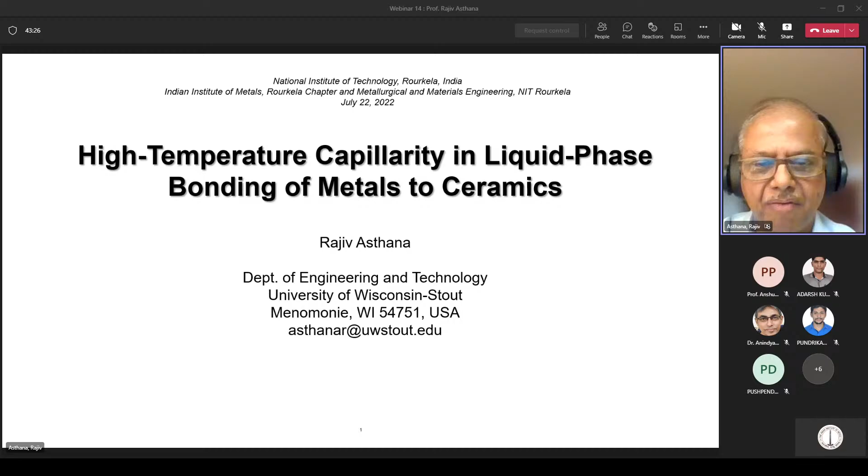The university is basically the only so-called polytechnic university in the state of Wisconsin. In Wisconsin we have several different universities; the state university system is called the University of Wisconsin system. Madison and Milwaukee are the two major flagship campuses, and then we have 12 other campuses of the University of Wisconsin, and Stout is one of them. We have very comprehensive career-focused programs, and our employment of students has been very, very good for the last several decades.

So with that, let us get back to the topic here. What are the areas impacted by the considerations of high temperature capillarity?

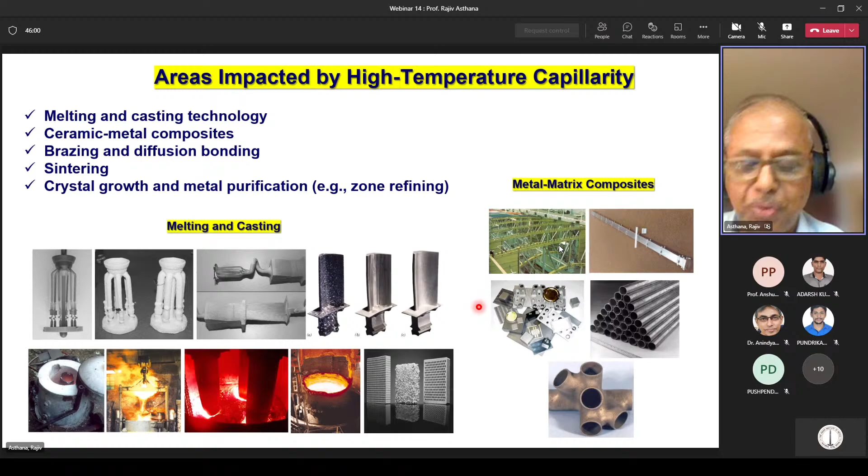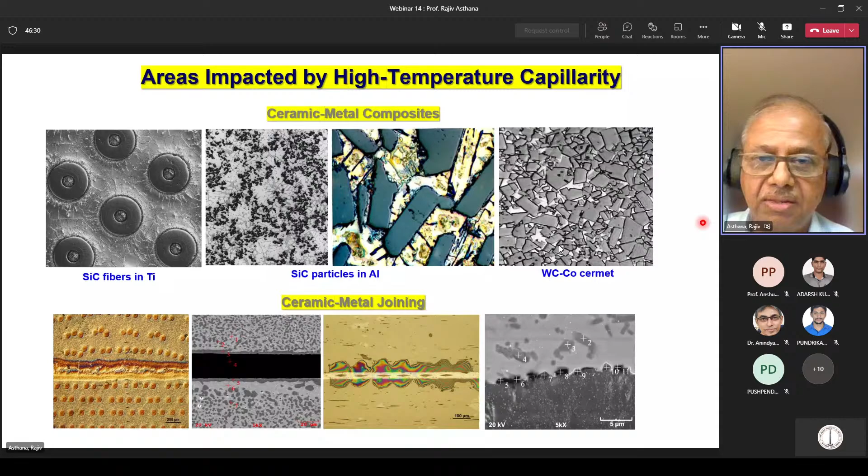We all know about metal composites, ceramic metal composites. You're basically trying to join either fibers of a ceramic or particulates with a metallic matrix, so it's again a joining case. Actual brazing and bonding involve macroscopic or large bulk specimens to be bonded to one another with a metallic or non-metallic interlayer. So these are the areas that we consider.

Here are some other examples I've been working on for the last several years. In joining, we looked at NASA's fuel injector system where we were trying to join silicon carbide discs to low expansion Kovar tubes. These are fuel carrying Kovar tubes, and these are perforated silicon carbide discs through which air would flow. These had to be joined together either by brazing or diffusion bonding, and the Kovar tube also had to be joined to silicon carbide. That was one system we looked at.

We created heat exchanger elements. This is just one unit where you have titanium tubes carrying a fluid that is bonded to high temperature carbon-carbon composite sheets and supported with highly conductive porous carbon foam. These kinds of elements are stacked and joined to create a heat exchanger. So we were looking at just the basic materials science part of joining here.

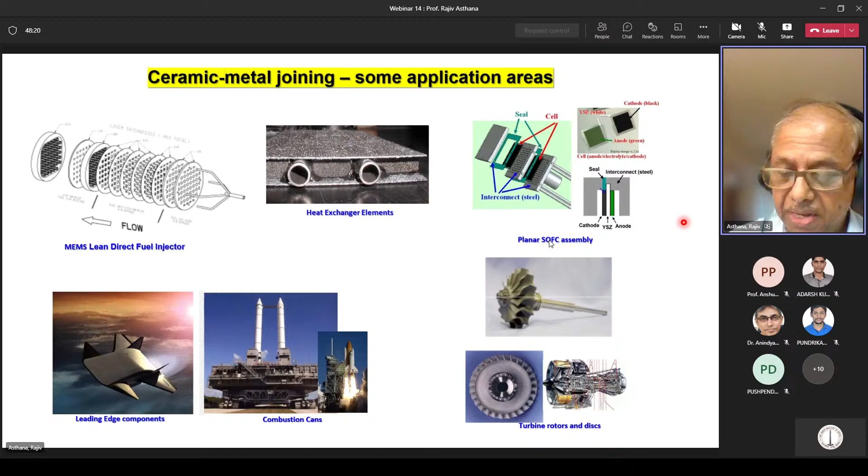We looked at solid oxide fuel cells, where you have a steel interconnect to be bonded to, let's say, zirconia, a YSZ kind of ceramic material. And then high temperature systems, silicon carbide composites joined either to themselves or to other materials. Also high temperature diboride based materials, and silicon nitride joining to Inconel and similar alloys for turbine applications. So those were some general areas.

I'm going to look at liquid phase bonding here in this talk today, so brazing is my focus. The concept in brazing is very simple. You take a joining material, basically some sort of a glue, metallic or glassy glue, and you melt it and then bring the two surfaces together under a very small pressure. The melted braze will spread over the surfaces, and upon cooling, the surfaces should bond.

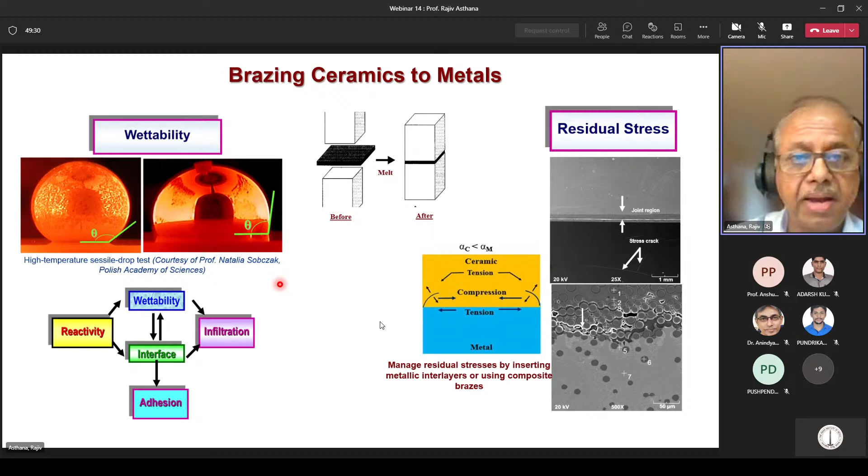Two key areas in this kind of process are wettability, the problem of wettability - that is, the liquid should be able to spread and bond to the surfaces - and then, because of expansion mismatch between the surfaces, there is quite often a lot of residual stress that has to be managed in some way or other. So in my talk today, I'm going to look mainly at the wettability part in high temperature systems.

The question is, why study high temperature capillarity, which is also called wettability? It's a very old, much researched topic, so what is the purpose of doing additional research on that? Well, there is a lot of data available, but very few data have high precision. The experimental process is very difficult. It's not easy to conduct these kinds of experiments because the conditions for experimentation have to be very stringent. Even under vacuum in your furnace, you are oxidizing the liquid metal, and that could interfere with the spreading process.

We will see some results on that. Also, there is no standardized procedure for characterizing the wettability of systems - we don't have any ASTM, ISO, or other kinds of standards. That is one of the challenges we have in studying high temperature systems. For low temperature liquids like water or organic liquids, there are a lot of commercial units available - optical tensiometers, as they're called, or goniometers, very simple devices that give you the wettability or contact angle data - but you don't have any system like that for high temperature systems.

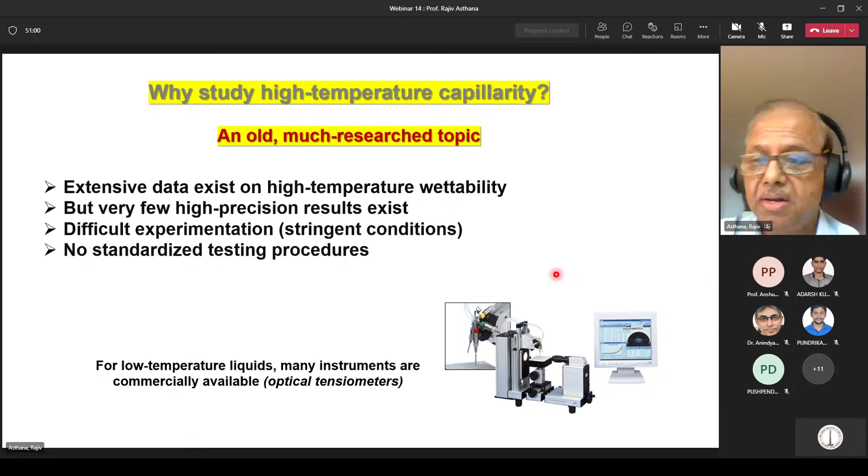And that is the reason we have some special needs here. Here is an example of a simple system: pure aluminum melt in contact with aluminum oxide. If you look at the literature data on contact angle versus temperature, you see numbers all over the place. Even with a small superheat, look at the scatter in contact angle data - somewhere from 85 degrees all the way to 165 or 170 degrees. The reason for that is that these kinds of measurements are extremely sensitive to testing conditions, material preparation, and other things. In fact, in the classical literature, contact angle has been used as a probe to study surface and interface phenomena.

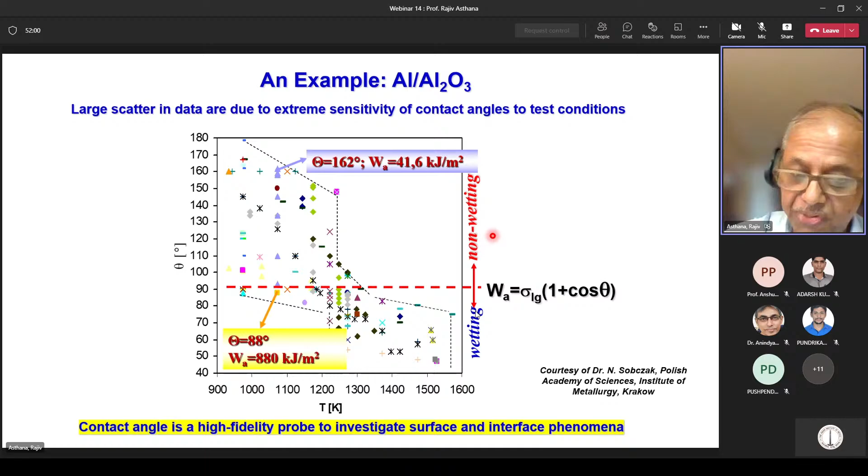Low temperature systems are much easier to examine than high temperature systems, and that's why we need some special devices to study high temperature interaction between liquid metals and solids.

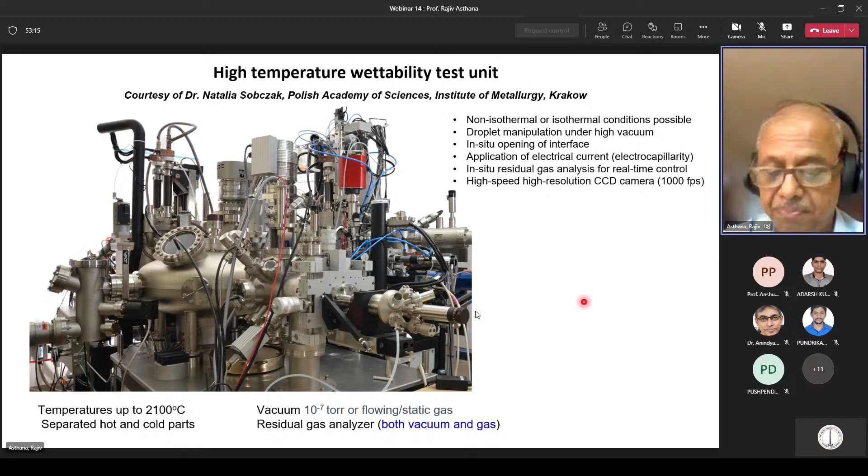So those issues are not critical in low temperature systems that have been studied in many other areas, but high temperatures present unique challenges. Just for a moment, going to the basics for students who may not be familiar with the topic: when you have a liquid droplet, a very teeny droplet that you bring in contact with a solid surface, the liquid spreads and then it stabilizes. Typically, if you have water on a clean glass slide, it will take a few microseconds for the droplet to stabilize and give you an equilibrium shape. For high temperature systems, the liquid droplet will keep spreading for half hour or an hour or more, mainly because of the reactions and interactions that take place between the liquid and the solid.

So the angle of contact is basically defined as the angle between these different interfacial tensions that occur at surfaces or interfaces between different phases: liquid, vapor and gas, liquid, vapor and solid. All of this formalism was developed more than 100 years ago for low temperature systems, and the same concepts are being used for high temperature systems, although not very effectively because of these unique challenges.

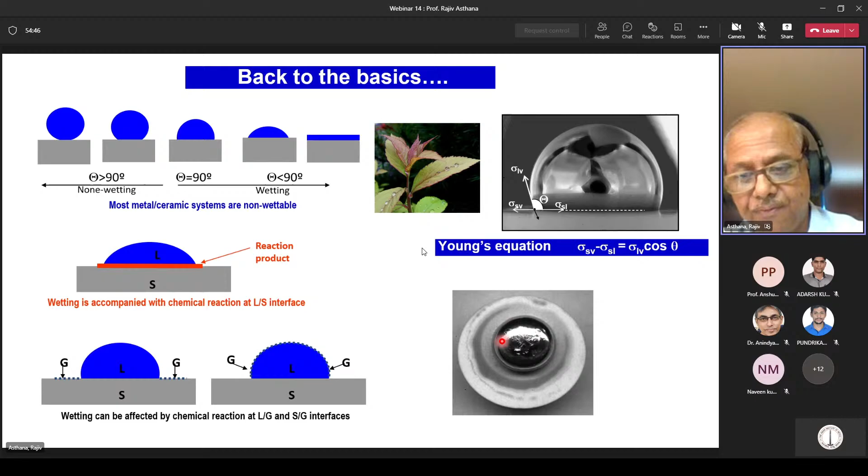Reactions, oxidation, surface roughening ahead of the spreading droplet, evaporation and condensation of the liquid ahead of the droplet in the vacuum chamber - the surface gets modified while the droplet is spreading. So those kinds of things, some of those things we looked at.

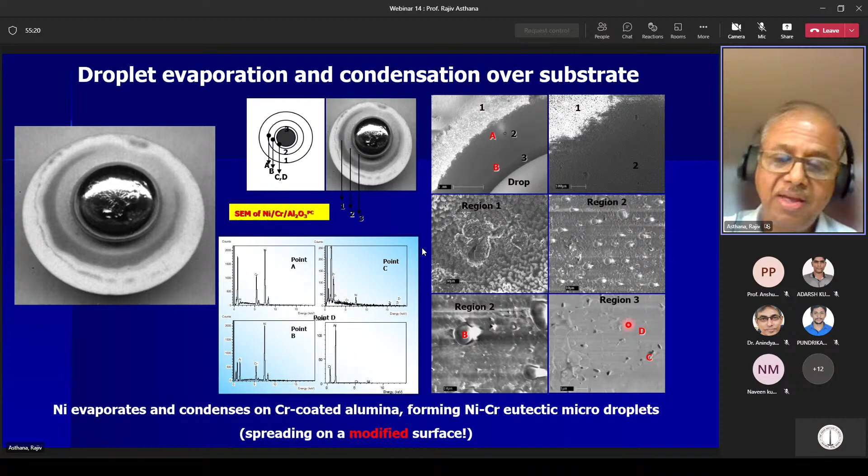Here is an example of a nickel droplet on a chromium coated aluminum oxide substrate. What we see here is that during the testing process, there is evaporation and condensation of nickel vapor on the surface, and it forms some little teeny eutectic droplets of nickel chrome over which this larger droplet is spreading. So these are very, very complex systems compared to the low temperature systems.

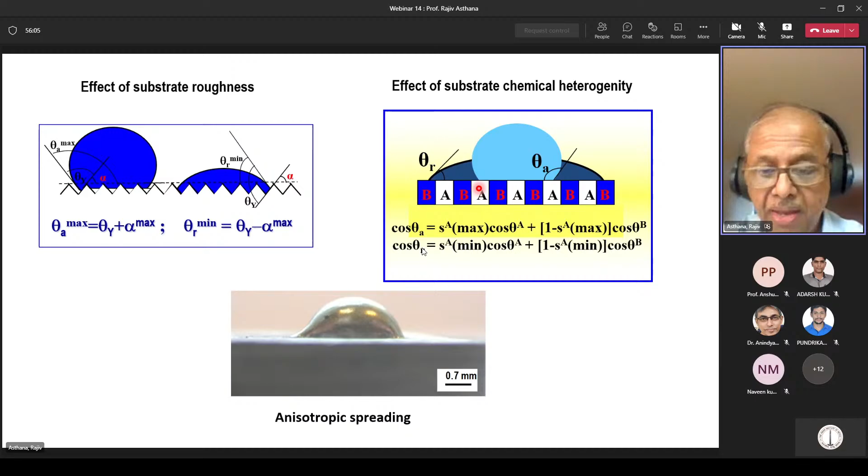Roughness of the substrate, the chemical inhomogeneity of the surface - all these things will influence how the liquid spreads and interacts with the solid. Sometimes the spreading process is not uniform or homogeneous. You have anisotropic spreading, so this side of the droplet spreads differently than the other side. Even in a simple system, like ordinary steel, a liquid will spread differently on, let's say, cementite and ferrite areas or other types of inhomogeneities. So it's quite challenging when you have high temperature systems.

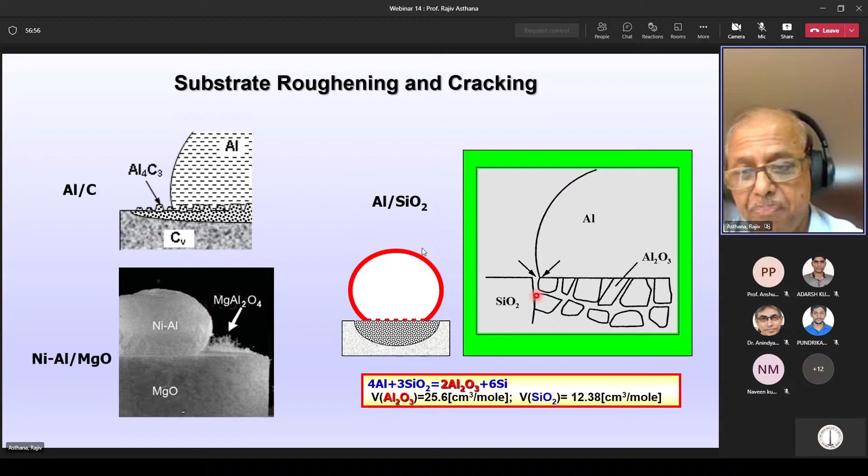In the nickel aluminum system, when nickel aluminum droplets spread on magnesium oxide, there's reaction and magnesium spinel forms like whiskers ahead of the droplet. In the aluminum silica system, for example, there is reaction between silica and aluminum oxide forms, and there is volumetric expansion, which again causes cracking and roughening.

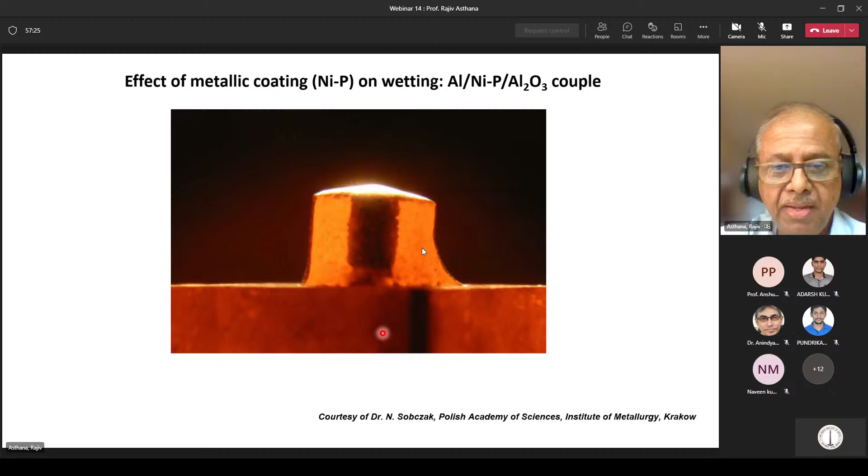So here is an example of how we study wettability in some systems. We are looking at aluminum droplets spreading on an aluminum oxide substrate with nickel phosphorus coating on it. These tests were done in Poland. And you can see that the liquid melts and begins to spread on the surface here.

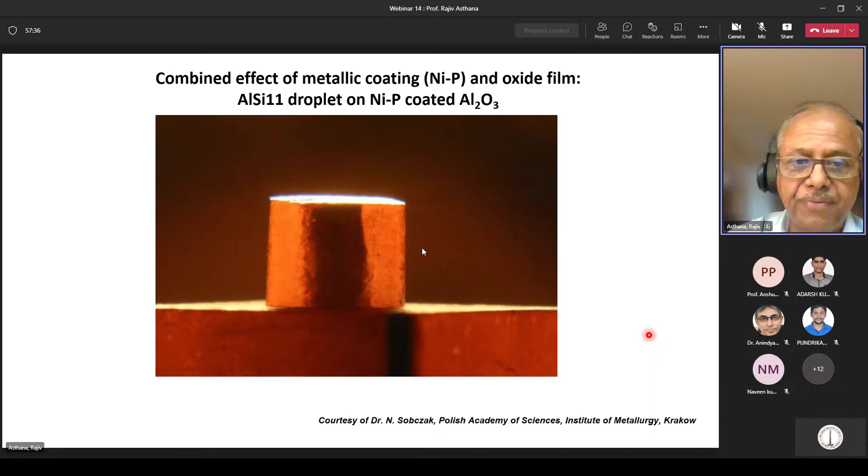Now, if you did the same kind of experiment in an environment where an oxide film forms on the droplet, the oxide prevents spreading of the liquid on the surface. And you can see this here.

Are you able to see the movie? I'm just checking it. Can you see that clearly?

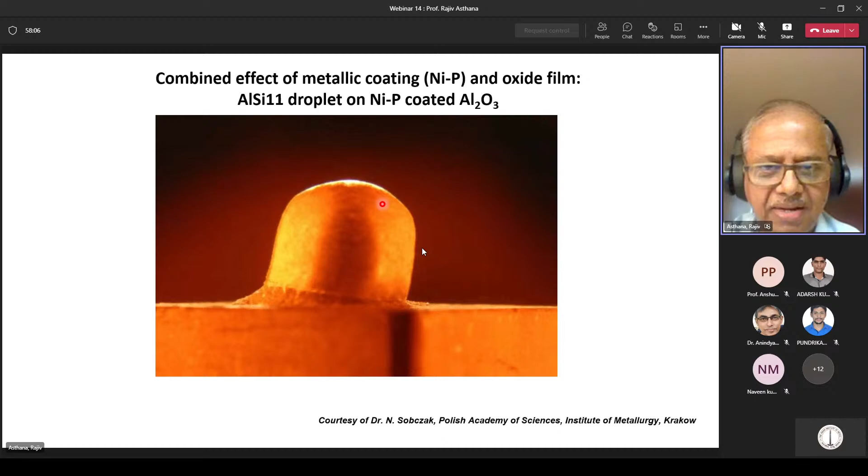Look at how this 2 millimeter droplet is spreading, and this oxide skin is preventing the spreading of the liquid underneath. So when you have situations like these, if you measure the contact angle without understanding what is happening on the surface, you get incorrect data.

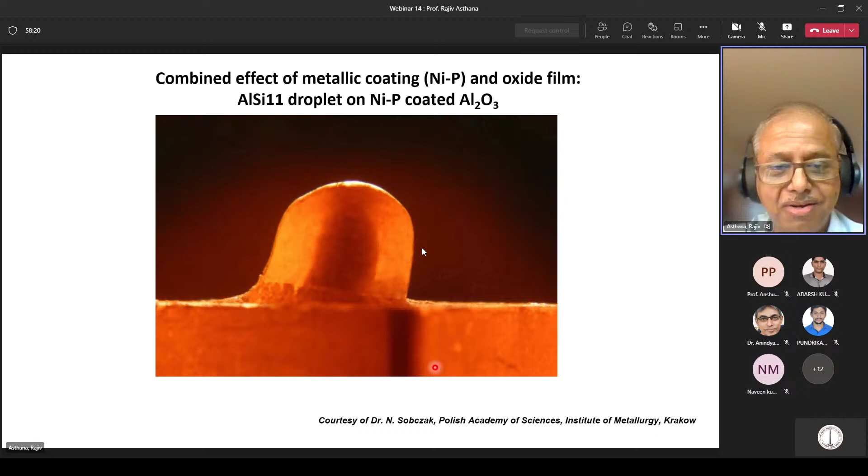Here is another video clip that shows what happens to the oxide skin when you go to high temperatures. It will dissociate and allow liquid to spread more homogeneously.

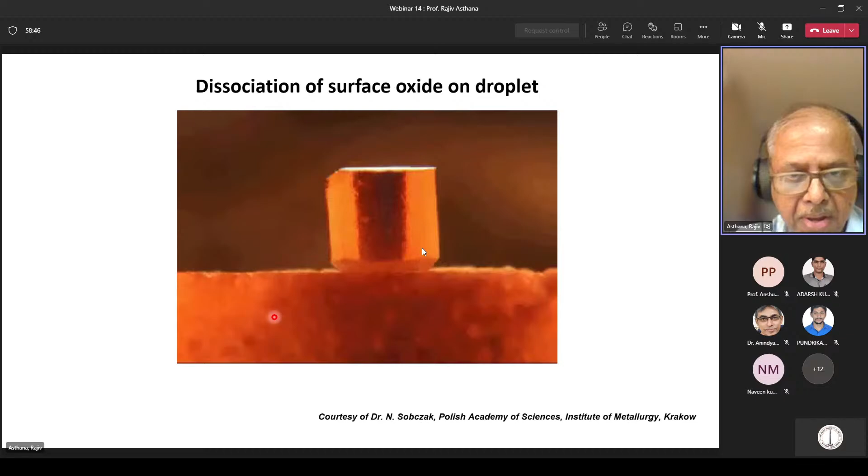I think for some reason my video clip is not running. Let me see if I can make it run here. You see the oxide that broke off on the droplet, and you can see the camera reflection very clearly.

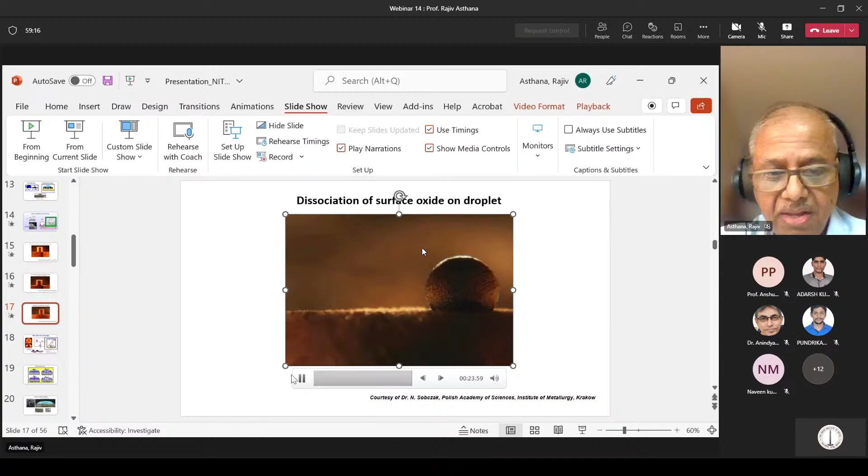Remember, all these experiments are being done under fairly high vacuum. Even then, the droplet is getting oxidized, which is not unexpected. And once again, if you take a look here, you will see the oxide breaking. You see here the little particles break, and it becomes a cleaner droplet.

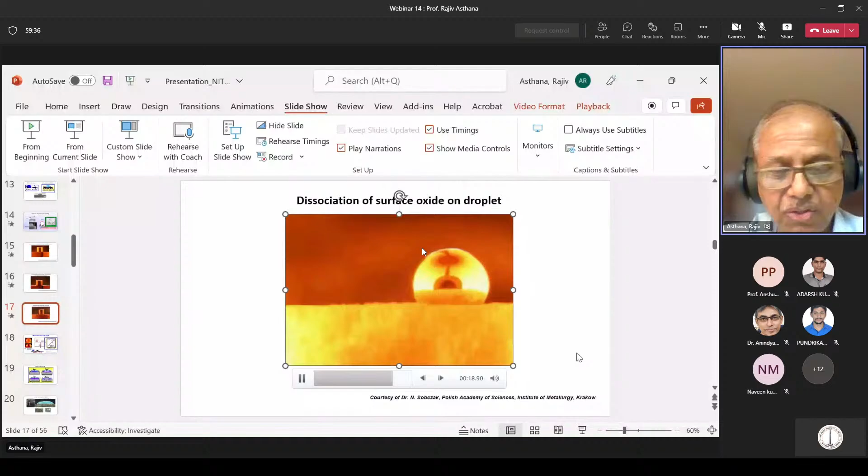So these kind of experiments allow us to study the liquid metal solid ceramic interactions in more depth.

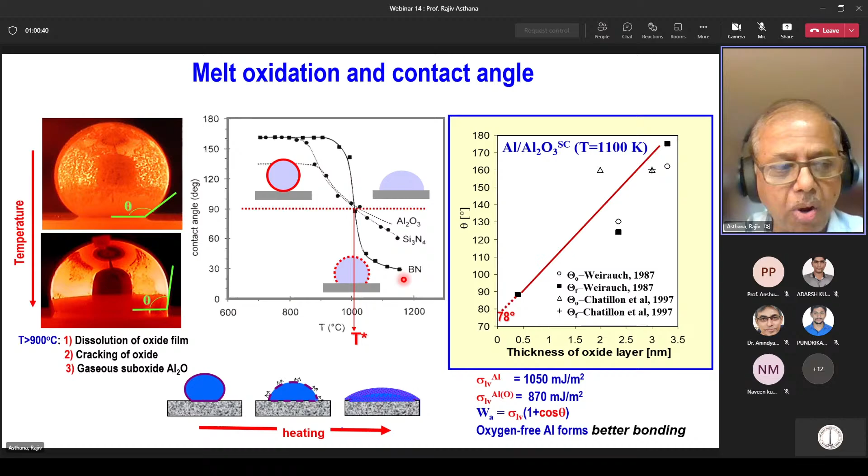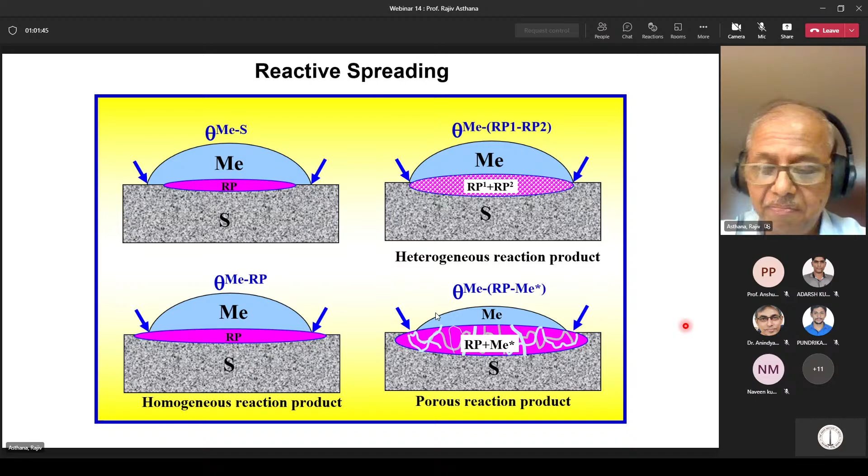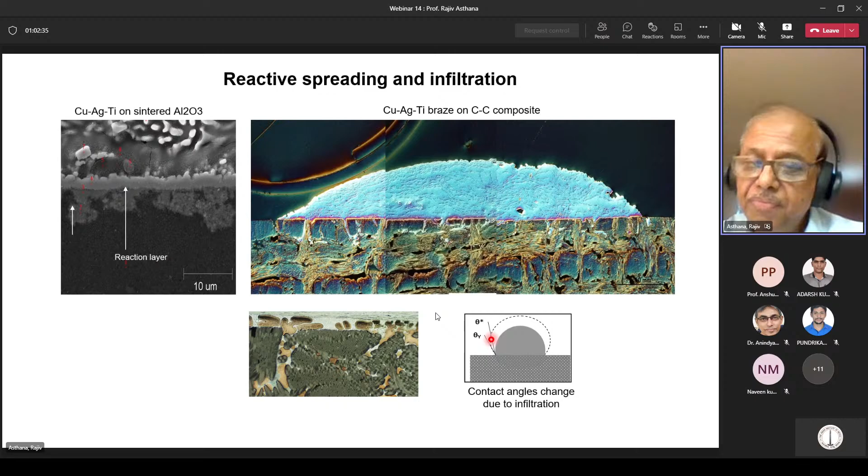So in many cases, the measured angle in high temperature systems is not really a thermodynamic angle. It is more of a practical indicator.

So most wetting tests are done using what is called a sessile drop method and using a contact heating process. So the idea here is that inside the vacuum chamber where you have the furnace, you put the solid sample on a solid substrate and then heat them together until the liquid melts and begins to spread. And then you can image continuously the spreading process, and from that, you can determine the contact angle.

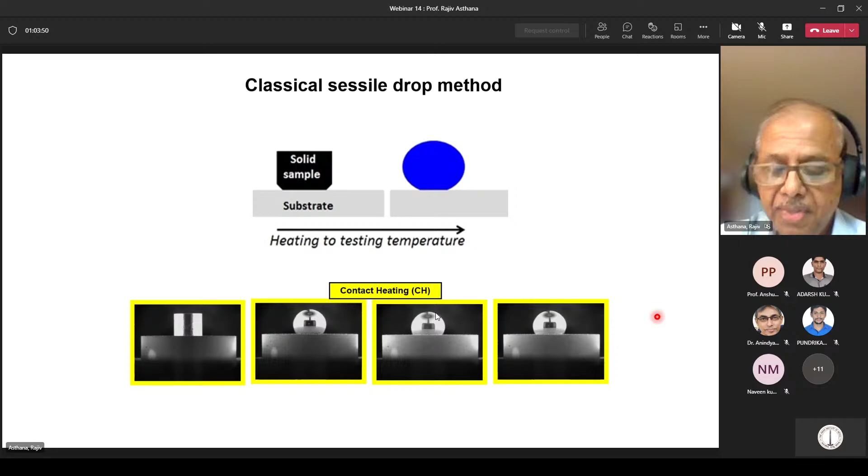The problem in this kind of experiment is that you have no way to control the reactions or interactions taking place while the solid samples are getting heated. And also, it is difficult to time the beginning of interaction between the liquid and the solid because the melting process is not obviously instantaneous. So because of these challenges, this kind of contact heating is not the best method.

A better method is what we call capillary purification process, where you squeeze a liquid metal out of a high purity aluminum oxide capillary.

So you heat the metal separately inside the vacuum chamber, and you heat the substrate separately in the same chamber. At some specific time, you squeeze the liquid droplet and bring it in contact with the substrate.

This kind of process does many things. One, it allows you to have an accurate estimate of the time of contact of the liquid and the solid.

Two, you are not heating the two things together until melting, so you can actually see the reaction between liquid and solid, not the reaction that takes place during heating of the solids in contact.

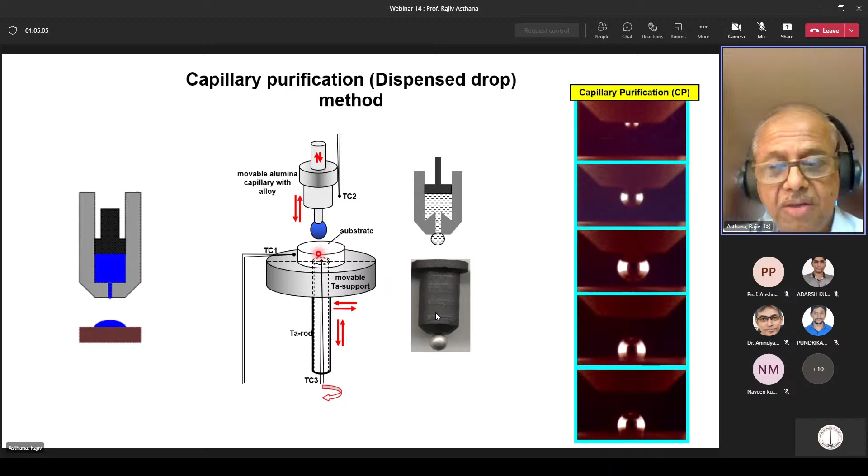The third point is the most critical one. When you squeeze the liquid out of the capillary like this, you are actually eroding or destroying the surface oxide film, giving a more accurate measurement of contact angle.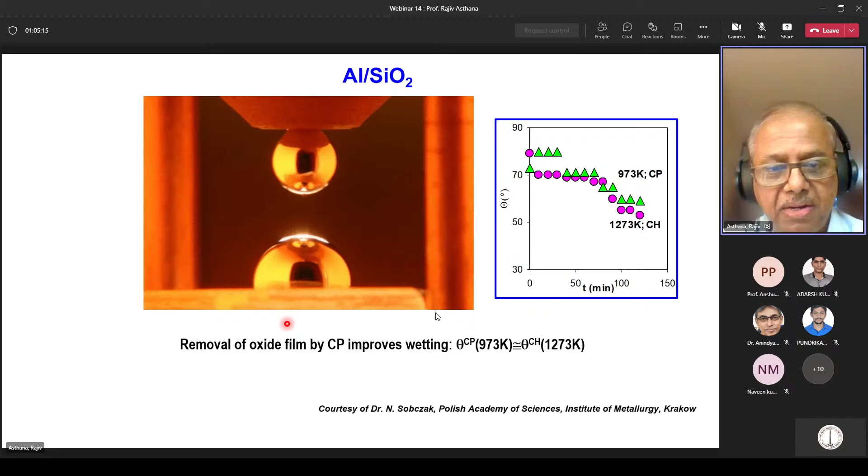This video shows what happens. You are squeezing the liquid droplet onto the surface of the ceramic and then allowing it to spread without any oxide skin causing problems.

If you look at the data of contact angle with time, contact heating gives you the same contact angle values at 1273 Kelvin that you obtain by this method, even at 973 Kelvin. So even at low temperatures, you get the correct contact angle that would otherwise only be possible in contact heating at very high temperatures, where the oxide dissociates by itself, either by dissolution in the liquid or gaseous suboxide Al2O formation and other things.

This is the case of aluminum on silica. You can see the same kind of behavior with other systems.

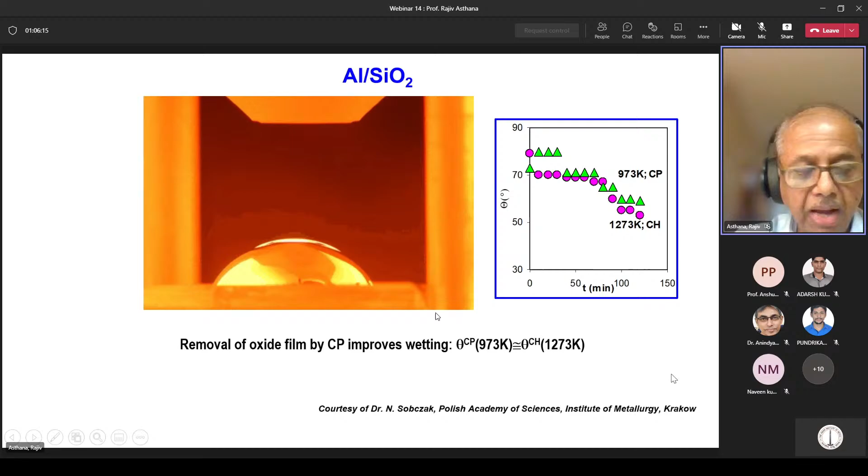When you look at aluminum on aluminum oxide and run different experiments using capillary purification, where you're squeezing the droplet out of a capillary, and compare the contact angle values with those obtained by contact heating of aluminum alumina, you can see the effect of removing the oxide film.

Again, at low temperatures, you are able to get a very clean surface and low contact angles that are not possible at fairly high temperature in contact heating kind of a process.

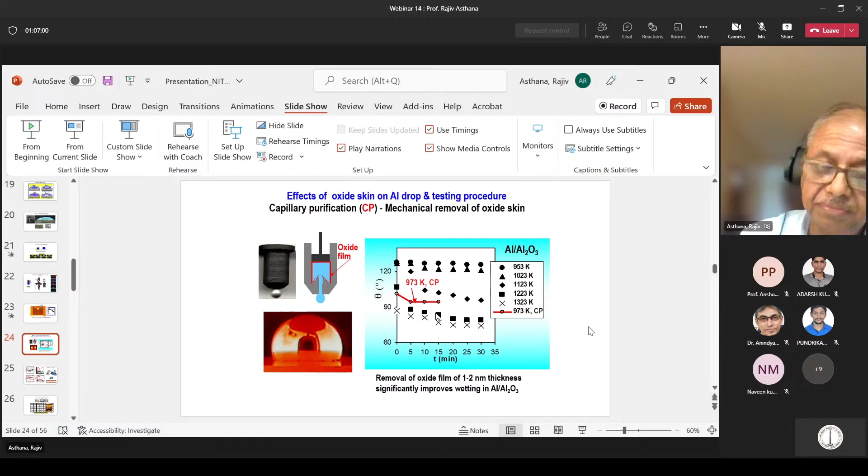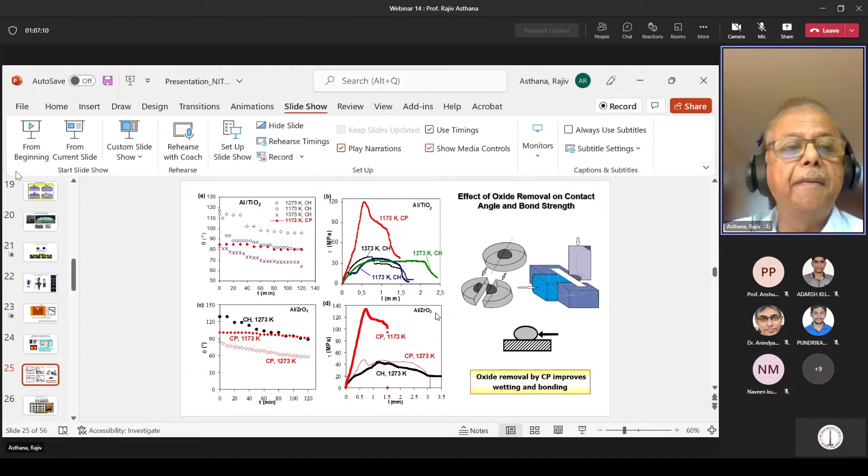These are some data that show what happens to the bond strength of the joint in a system like that. We are looking at aluminum droplets on titania substrates, with experiments using both the capillary purification process and the contact heating process.

For these two types of sessile drop tests, we let the test run, then solidified the droplet, bisected the droplet assembly, and did shear tests. Based on those, we estimated the shear strength or bond strength.

This is the bond strength versus the displacement of the droplet during this kind of test. These are the contact angle data with time for contact heating systems, and the red one is for squeezing the droplet out. Because we were able to remove the oxide skin, we got very high bond strength in the system, even at 1173 Kelvin wettability test.

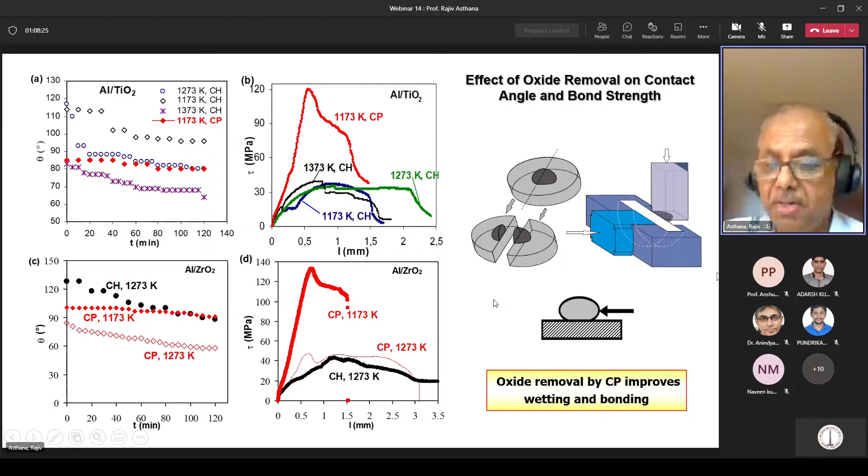And even at 1373 Kelvin, contact heating did not give that level of bond strength because the contact was not very good. Interference from oxide caused this problem.

Some of the tests we did were on composites, because my interest has been in joining ceramic composites to alloys. Because of the inhomogeneous surface of ceramic composites, even after polishing and cleaning, the spreading process is not very homogeneous or uniform. The droplets spread anisotropically, not in a nice circular fashion, but in a more anisotropic fashion.

So again, we measured contact angles by contact heating, and some capillary purification methods were used as well. In most cases, we see good wetting, mainly because our brazes were all reactive brazes.

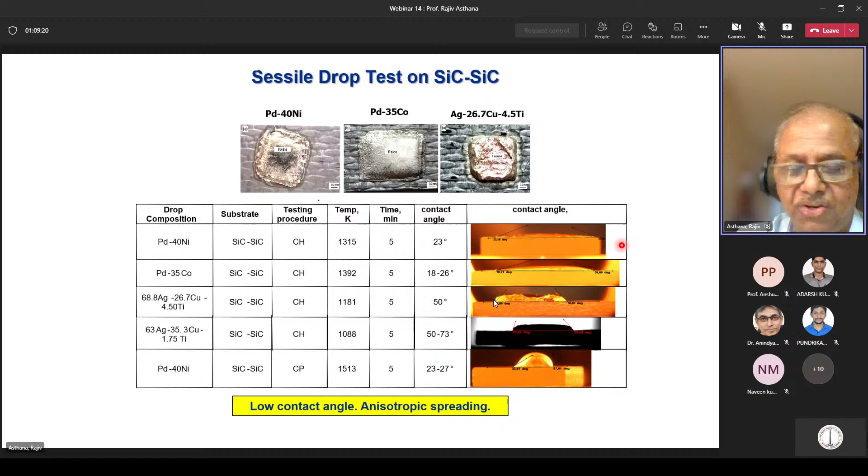But from a fundamental point of view, none of these angles is actually the Young contact angle. It is, again, a practical indicator.

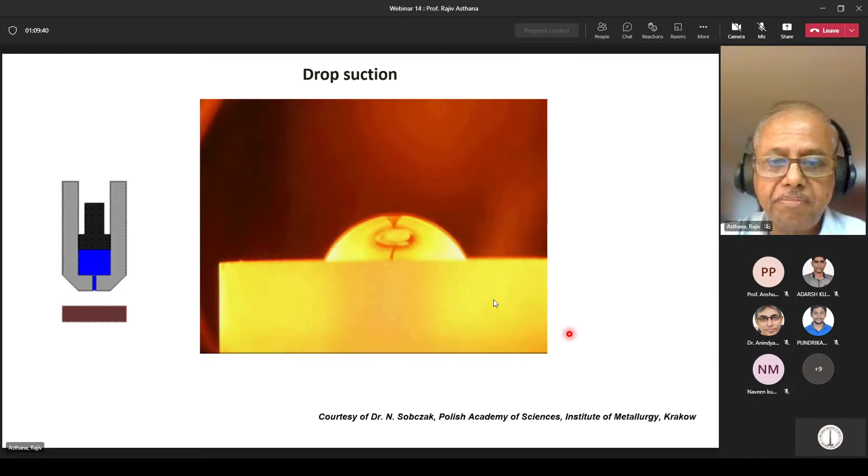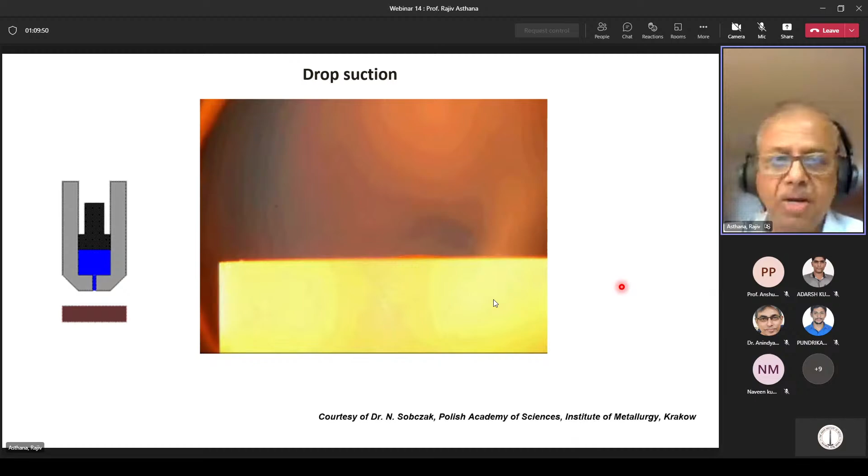One process we use is drop suction. You can actually lift the drop from the surface and open up the interface, then study the interaction between the liquid and the solid. After some time, you can lift the droplet, open up the surface, cool it, and see what kind of interactions took place as a function of time.

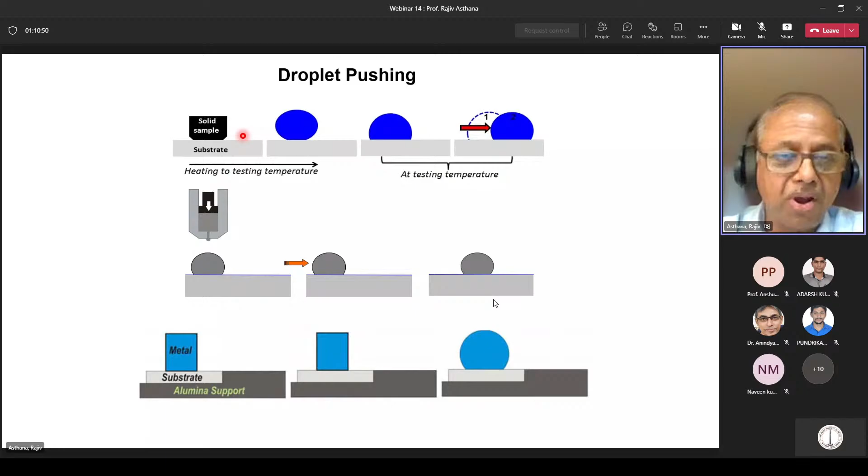We are also able to manipulate droplets in the chamber. You can slide the liquid droplet on one surface. So this droplet was here, we pushed it, opened up this area, and then we can examine it upon cooling, what kind of interactions took place. These kinds of things allow us to control the time of interaction accurately between the liquid and the solid. But you can imagine these experiments are extremely difficult to conduct, mainly because you're trying to manipulate teeny liquid droplets inside a high vacuum system in a chamber where you are continuously heating the systems. You could do this kind of pushing of droplets either when you have this capillary purification process or when you have this contact heating.

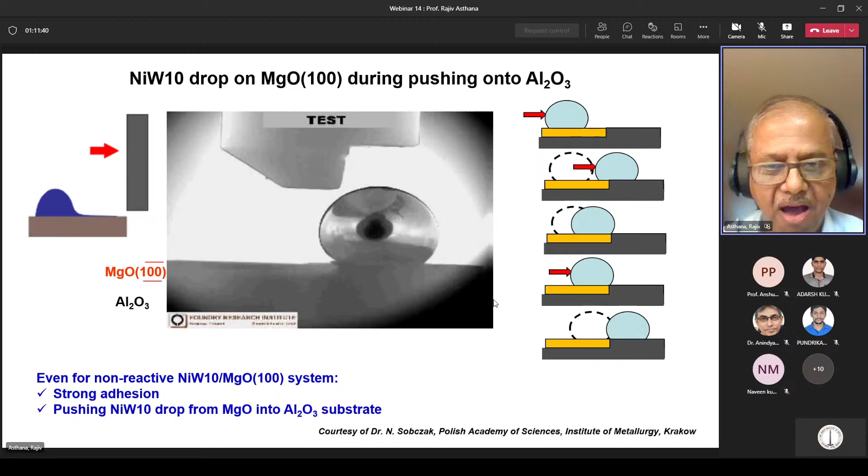If you look at this slide here, you are pushing this liquid droplet, and this is actually the nickel tungsten droplet on a magnesia 100 substrate. Even though the system is non-wetting, the droplet wants to come back to the magnesium oxide. There is good adhesion, even though the contact angles were high, so it was a non-wetting system. So those are some of the things that normally we don't consider. We think that if the wetting is good, adhesion will be good; if wetting is poor, that is, contact angles are large, the bonding will be poor. That's not always the case.

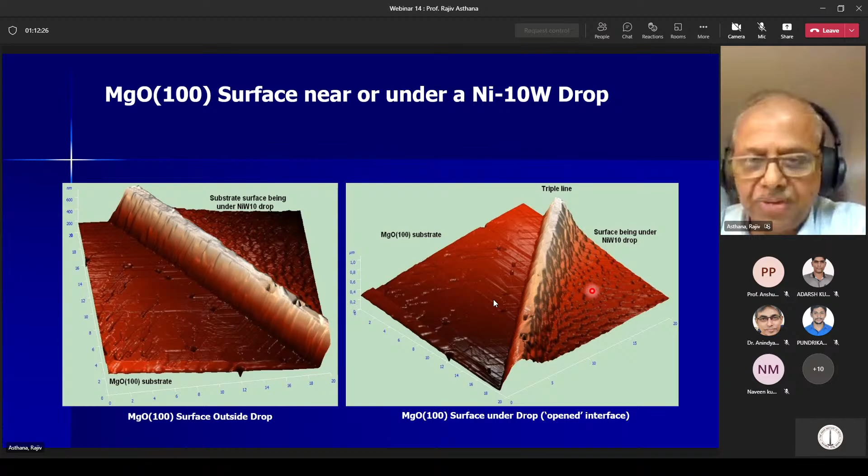Here we are looking at some of the droplet displacement results. Again, this is a magnesium oxide surface, and we have a nickel tungsten droplet that was on this side, and the droplet was pushed to open up the surface underneath it. This is actually the triple line, which was the liquid boundary between the free surface of MgO, and this side was under the droplet. These are AFM images where you can actually see the surface underneath the droplet. What we saw was that the bigger liquid droplet, about 2 millimeters in diameter, broke up into little daughter droplets, and those droplets reside inside these little dislocation etch pits. So when you push the droplet on the surface like that, the teeny micrometer-sized droplets actually break off from the mother droplet and get stuck in these little dislocation pits.

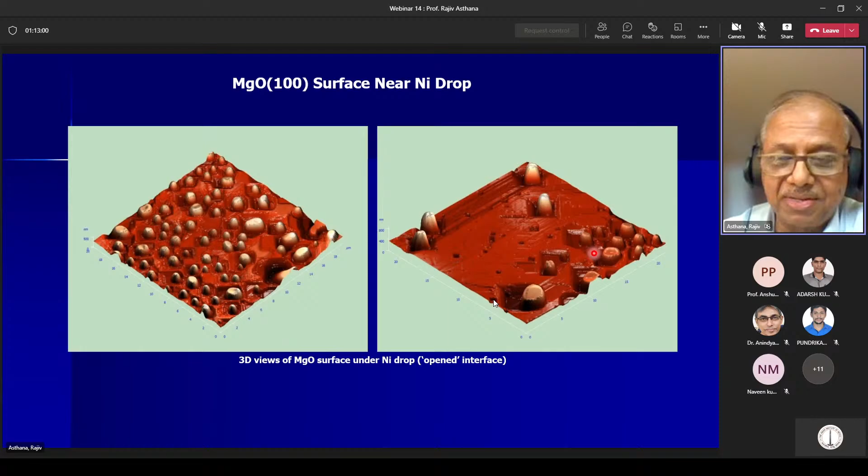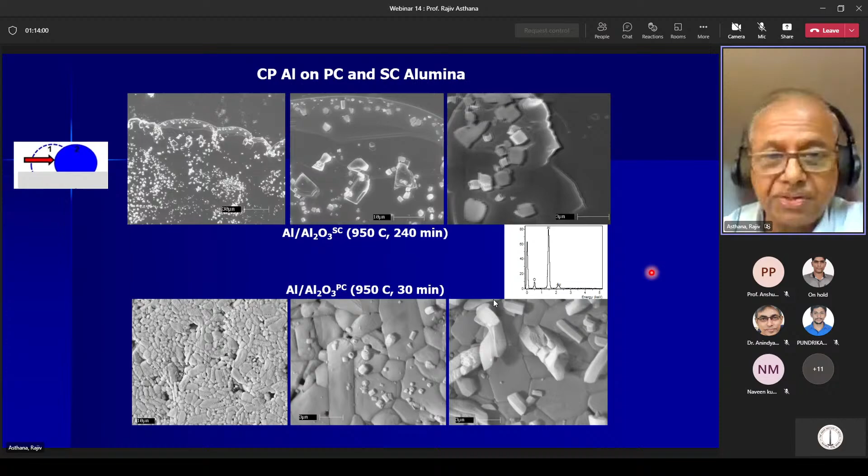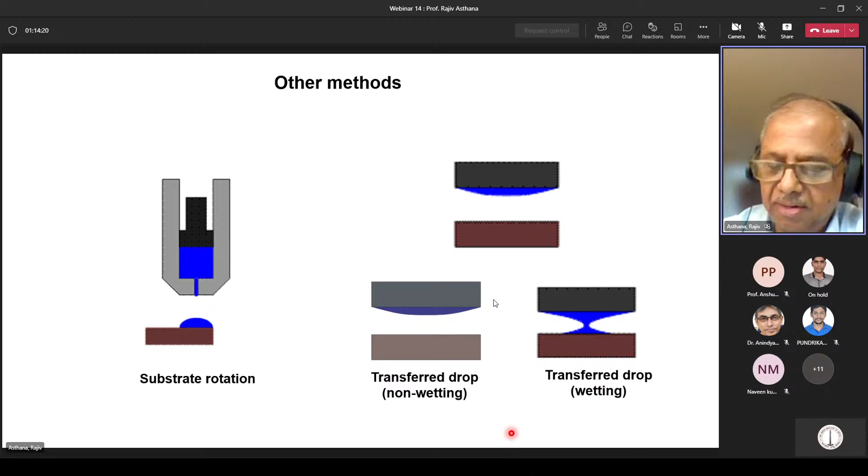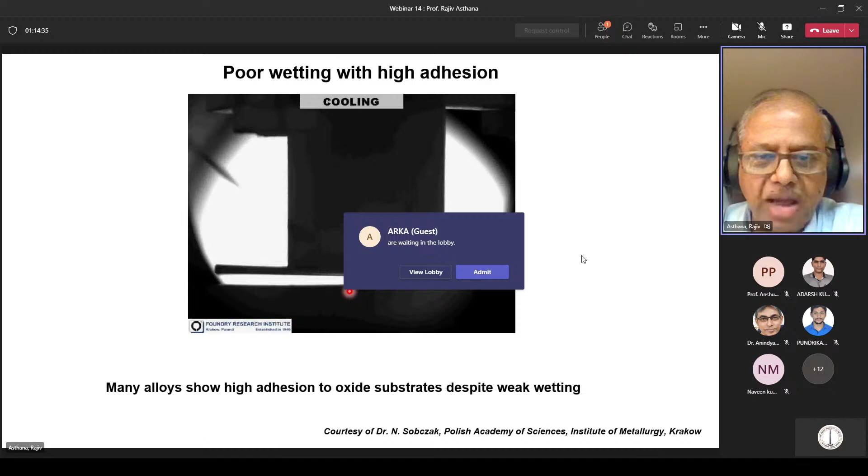Several other types of tests can be done. I will not spend time showing these, but you can actually shear the droplet during the squeezing process, and that allows you to study how clean, oxide-free liquid will contact a moving surface. Here you're looking at a system where the wetting, the contact angle, was poor, but again, the adhesion is good. So this ceramic is actually lifted up when the liquid solidifies because the contact was very good.

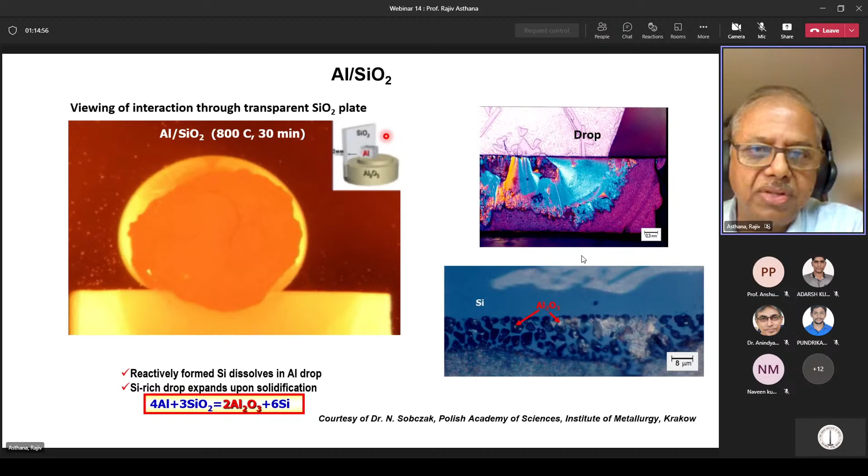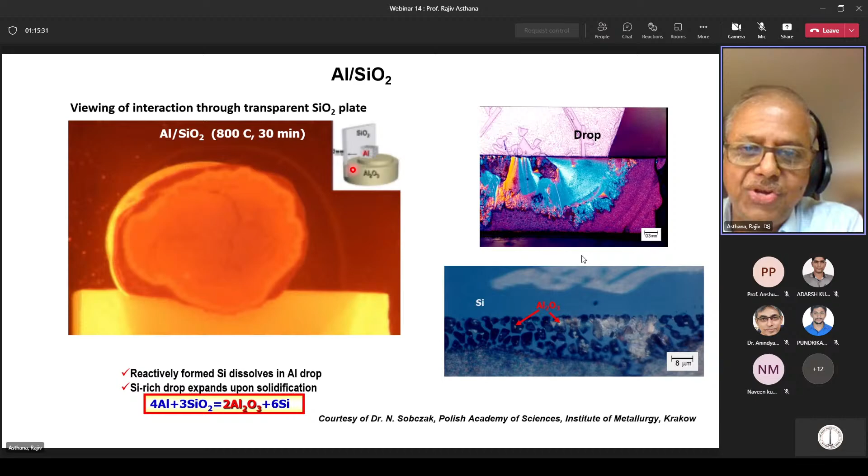Here we are looking at this kind of system. You have aluminum oxide on which you had a solid piece of aluminum, and this is the quartz silica transparent silica plate. Inside the vacuum system, when you melt aluminum, you can actually see through the silica quartz how the liquid is spreading and how the reaction layer is forming. Later you can do actual chemical analysis and microscopy to see what phase is formed. But this kind of real-time visualization is interesting because these quartz plates of silica allow you to see through the region and study the reactions between aluminum and silica.

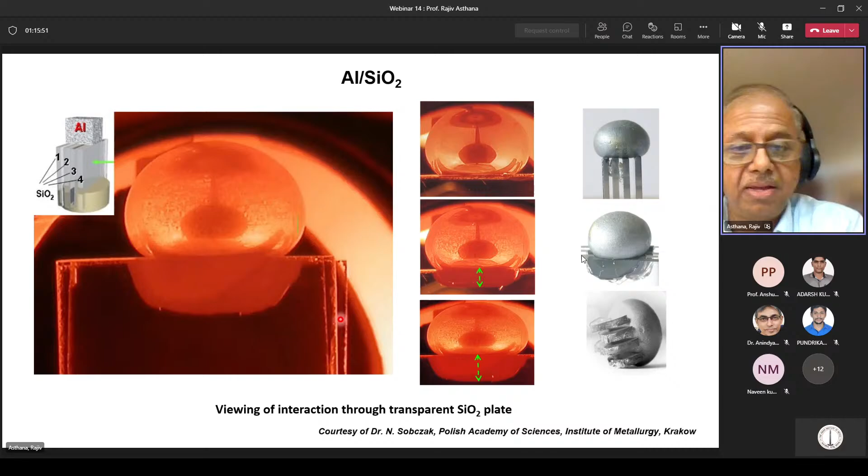The same thing is being done with multiple silica plates where you had aluminum on top. So you're melting aluminum and allowing it to infiltrate the gaps between these quartz plates, and you can actually see the liquid propagating and how the reaction layer is forming. After cooling, obviously, you form some quench cracks.

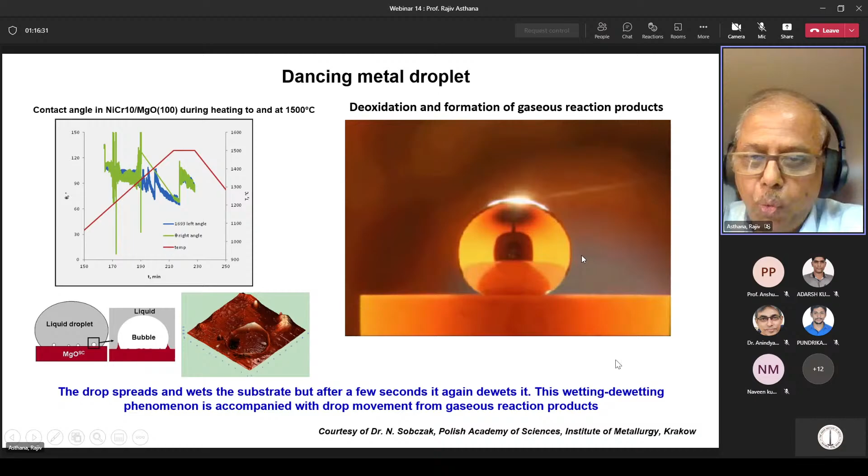Another effect we see is a kind of dancing of metal droplets. In low temperature systems, this has also been seen, something called camphor dance, where camphor liquid droplets actually dance around on the surface. We see something similar in high temperature systems. If you look at this video, you will see that there is a wetting and de-wetting process taking place, and after some time the droplets begin to bounce and jump around during the heating process. The reason for that is gas formation. Look at the bubble, the droplet, it is moving around on the surface.

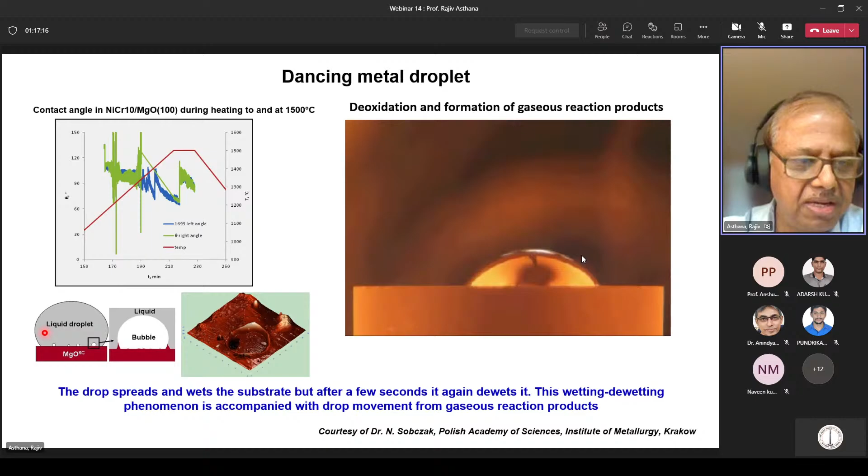If you go back and look at this area, this is during the heating process, and we are looking at very long times, 200 minutes, 230 minutes of contact time. This kind of process takes place mainly because under this 2 millimeter droplet, you have these teeny gas bubbles that evolve either from reaction or from degassing of the substrate, and they cause the droplet to dance around.

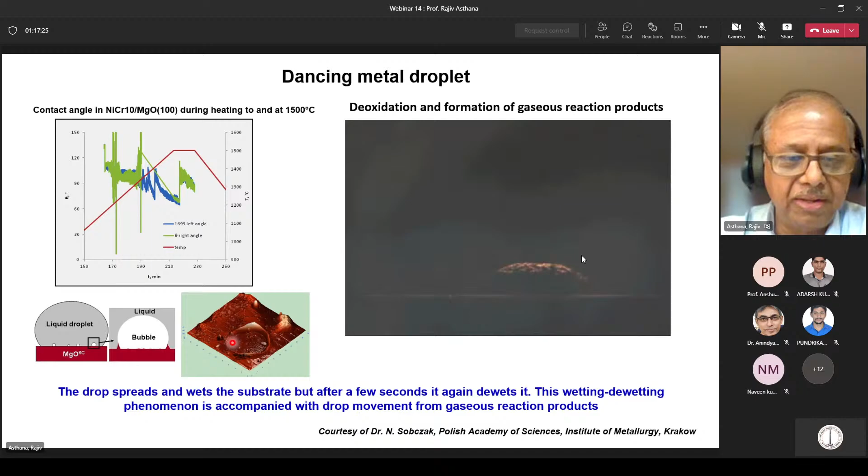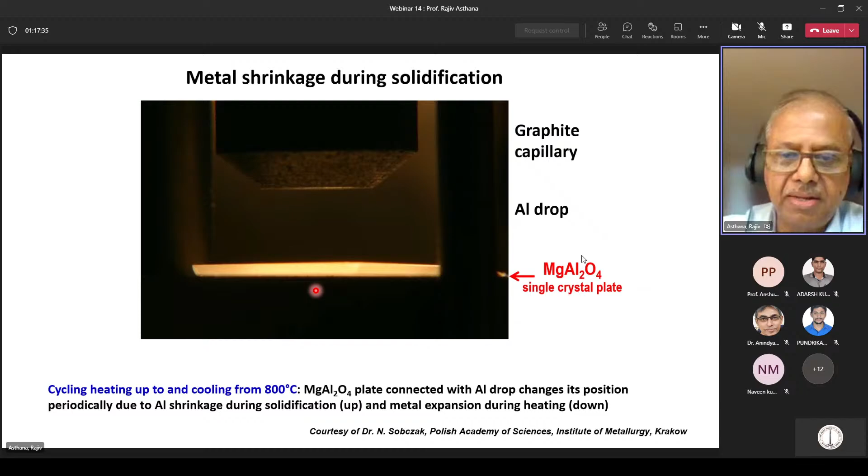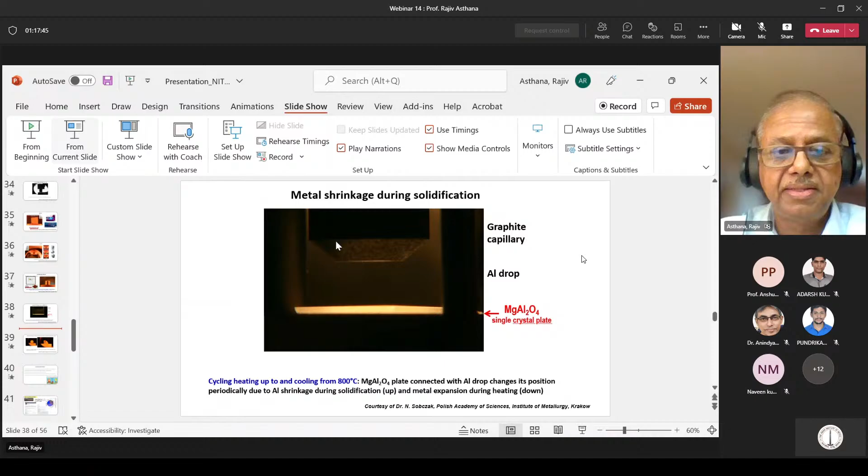Here you're looking at a system showing the effect of solidification shrinkage. When you heat the system, the plate, this is a magnesium aluminum oxide plate, comes down because the liquid is expanding. You can see it coming down here because of expansion, but the adhesion stays very good between the two. And when you cool, the liquid will solidify and the magnesium spinel plate will actually be lifted off because of the capillary forces here.

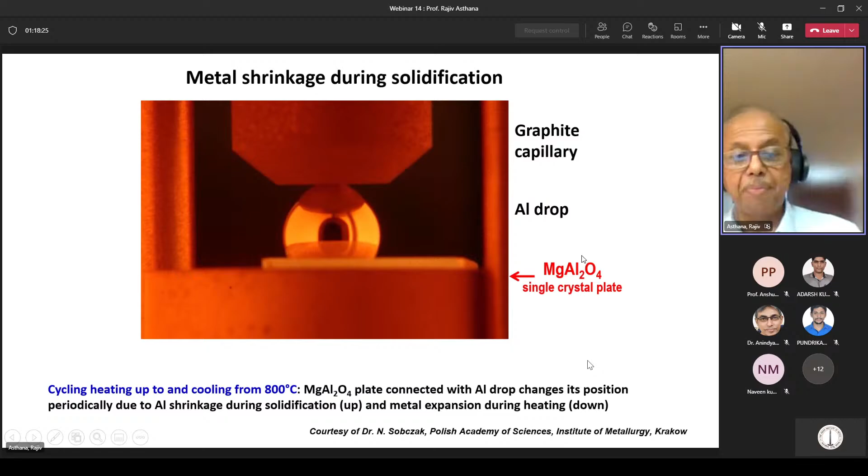We see these effects even in systems where there is no wetting, but the bonding is good. So now the plate is lifted because a good bond has formed.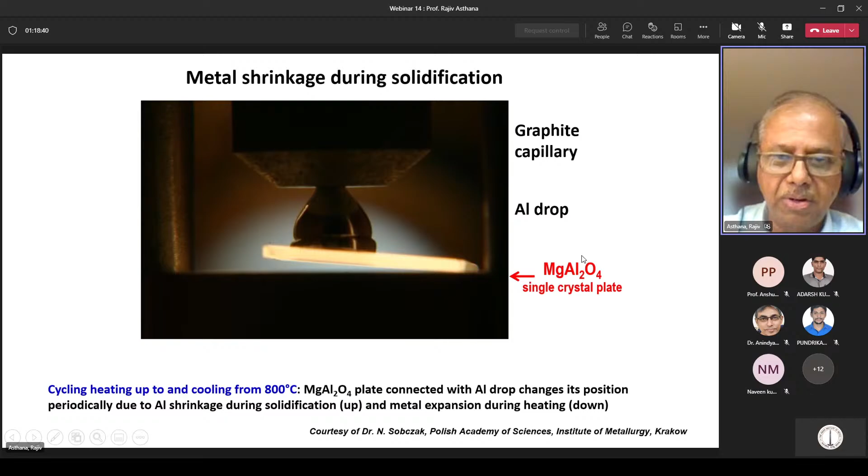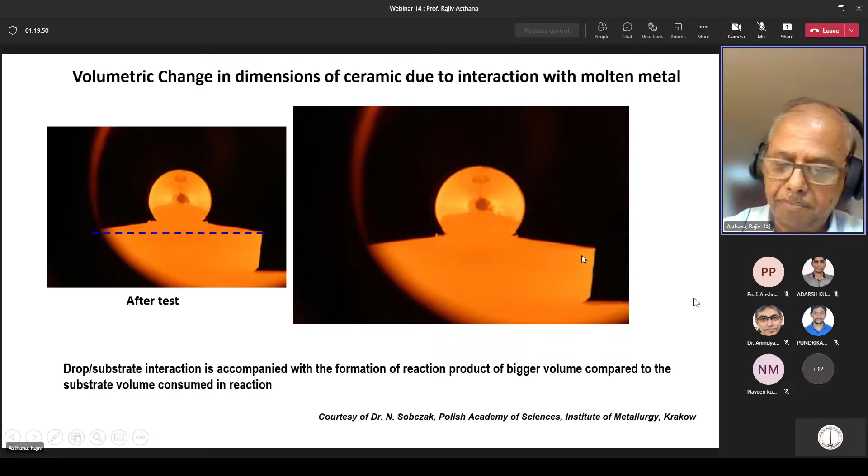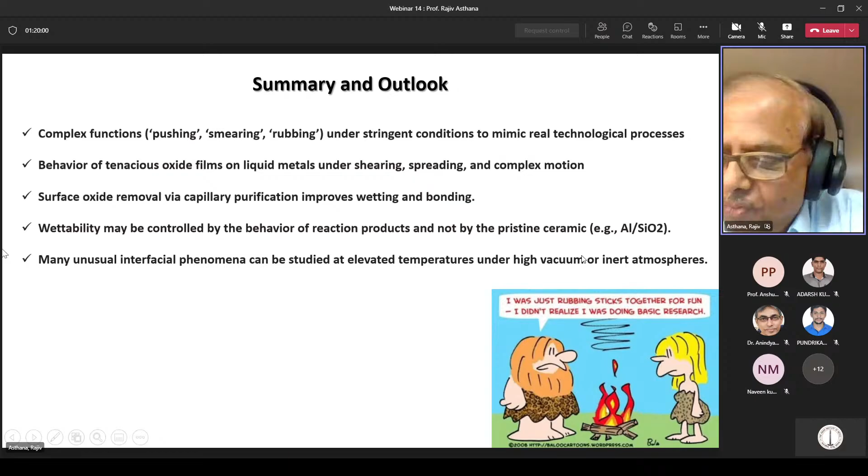So I think with that, I will summarize the main points here. My idea was to share with students some of the interesting things that are not commonly examined, even in simple systems. We are able to study complex phenomena under very controlled conditions, controlled atmosphere, and controlled temperatures. We can mimic real processes involving pushing, smearing, and rubbing actions. Oxide films on liquid metals, we can see their effect on spreading process and motion, on reactions. We can remove oxides and see what happens to wetting and bonding situations. And we can study many unusual processes using these kinds of high temperature wettability tests. So with that, I conclude my presentation.

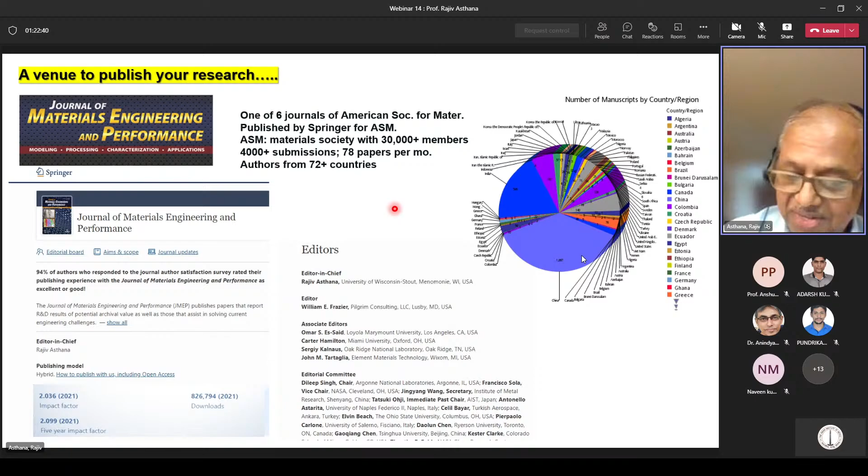And if you want to publish in special issues, you can do that. So with that, I say thank you, and I wish everyone good luck for your studies, research and scholarly activity. I go back to Dr. Patra, and if you have any questions from the audience, I'll be glad to answer.

Thank you, Professor Rajiv Asthana, for such a wonderful and delightful talk. There are so many new things, because I normally don't work in this particular field completely. Those who work on it, I specifically work on mechanical alloying and sintering.

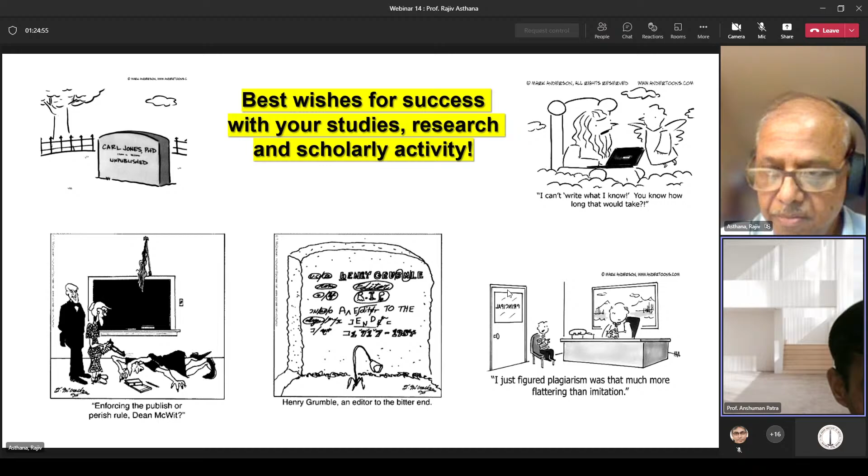Before I ask the participants to ask questions, I have a little query. Regarding the sintering process, what we used to do is mechanical alloying, and then we go for sintering. Specifically for liquid phase sintering, we have observed that this can lead to certain improvement in densification. Now sir, is there any chance that if we go for infiltration rather than liquid phase sintering, just infiltration during the sintering process, it will promote more densification rather than if we mix during mechanical alloying? Sir, can you put some light on it?

Okay, let me get back here. So you're saying that instead of trying liquid phase sintering, you want to infiltrate the system and see whether densification kinetics will be enhanced? Is that the question you have?

But liquid phase sintering also helps in more tightening, more compaction, better compaction, because capillary forces bring the powders closer together. So again, I don't work in this area, but my feeling is that perhaps infiltration might not give you the same quality of densified product as a sintered product. Again, this is something one has to try out actually to see whether it works, but that's just a hunch I'm speaking from. The reason is that a liquid from an external source may have greater difficulty penetrating throughout the bulk of your component.

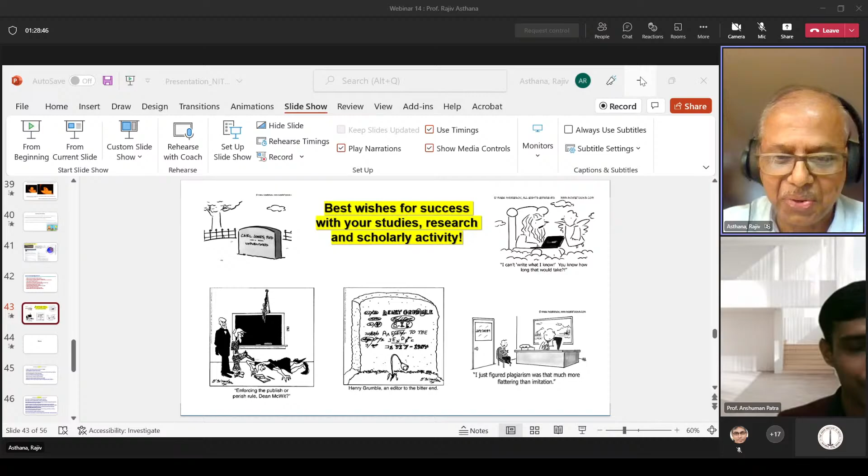For giving us the time. Yeah, thank you once again. Thank you very much for the opportunity, and I wish everyone best of luck and hope our paths will cross again sometime. Thank you, goodbye everyone. Bye sir, thank you.